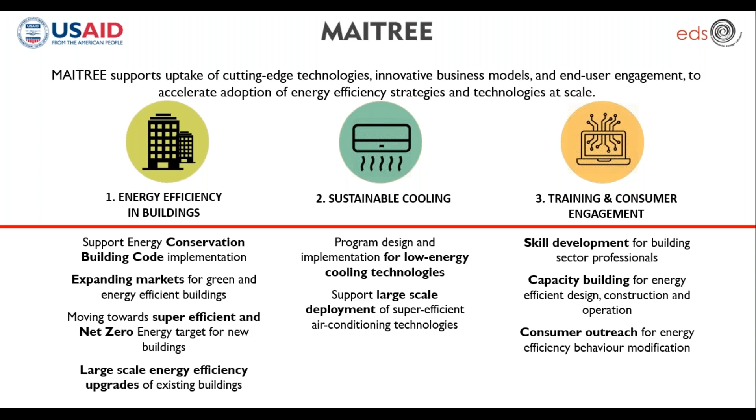The webinar series is executed under the MAITREE program supported by USAID. MAITREE is an acronym for Market Integration and Transformation for Energy Efficiency. MAITREE supports three main program areas: energy efficiency in buildings, sustainable cooling, and training and consumer engagement. The program works in partnership with several organizations such as Energy Efficiency Services Limited, Bureau of Energy Efficiency, and others to implement various initiatives. The market transformation approach includes creating business opportunities for the private sector, scale up of potential initiatives, enabling policies, as well as providing training for NZEBs. MAITREE is supporting effort moving towards a super efficient and net zero energy target for buildings in India.

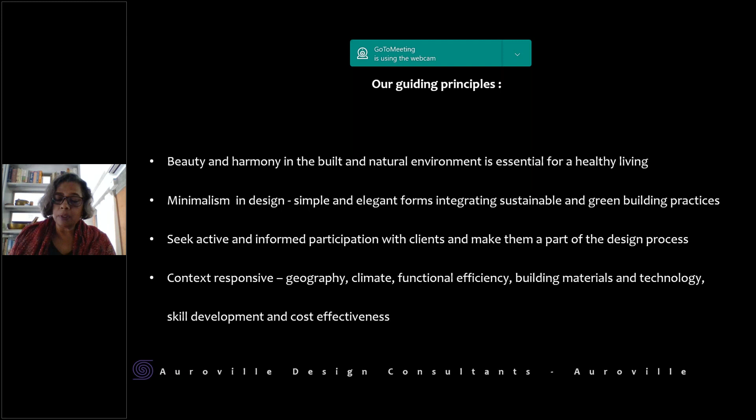Some of the projects we've been doing—the studio has been around now more than 3 decades. We did the Auroville Visitor Center, one of the first public buildings in southern India in compressed earth blocks. For almost a decade it was standalone in terms of energy, water, and sewage. We were treating the sewage on site, and that was the only water used in the landscaping.

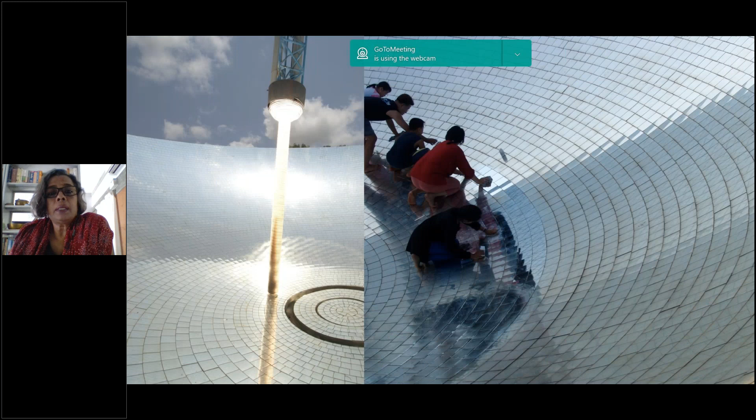We also undertook and implemented a solar thermal project with a fixed solar thermal device cooking food for 1,000 people each mealtime. This was completed a little more than 2 decades ago.

We have also been working with recycling of waste as the primary building material—this is an institutional building we did, again in Auroville.

We also do a lot of public buildings using earth as a primary building material, and most of the products that go into the building are non-industrialized products.

Now, coming to the main part of the talk, I'm going to talk about the HUMANSCAPES Habitat project. It is a case study, for me at least, of where design becomes a process rather than a product, rather than where you just go out with a set of skills and implement it.

The intention of the project when we started it was first to set benchmarks. We did that by inviting people with experience and knowledge to a one-day workshop, and went through several parts of the National Building Code, looking at what responses we could come up with to create a new benchmark for harmonious development, thereby addressing the present global crisis of energy and climate change. Especially for India, the crisis of energy is a very important point to address.

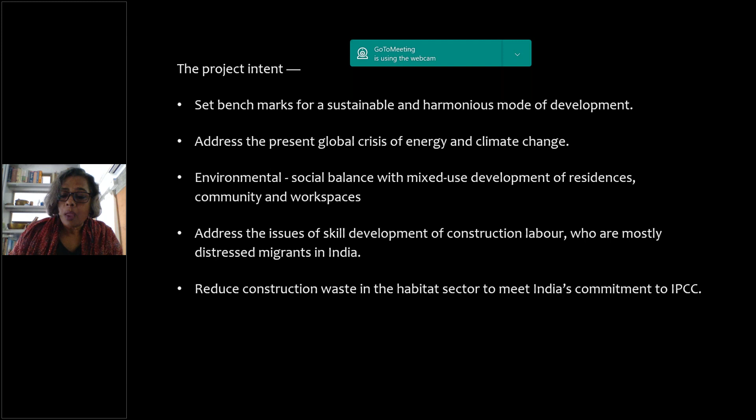So with these intentions, we fixed some project goals. Some of these were quite simple and straightforward—many of you work with these goals—which is integrated environmental planning, where water, energy, and waste cycles are closed, with zero discharge of water, reduction and recycling of solid waste, water-efficient landscaping, local endemic species, and urban agriculture.

The second goal was a sustainable built environment with solar passive building design coupled with efficient functional spaces, so that we reduce the built-up space and use low embodied energy building materials.

The third was addressing the mobility component, where work from home and integration of living and working spaces. It's amazing because we started working on this in 2014-15, looking at how living and working spaces could be integrated more with a better network of ICITI, and allowing for clean mobility options with social functions also mixed in.

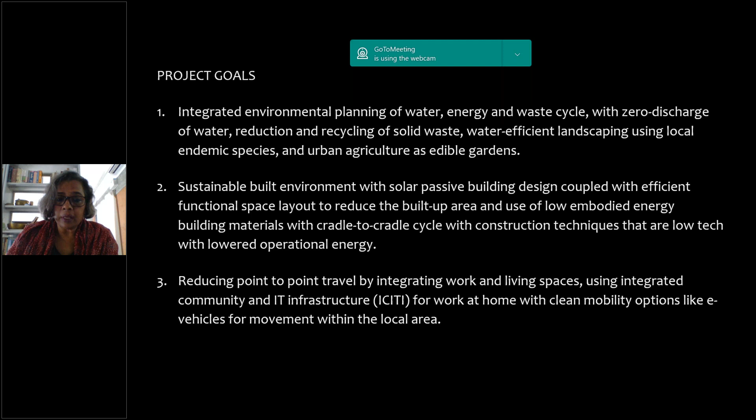So in a way, the project actually let us do a test run when the first lockdown happened a year ago, to see how we could operate from home.

The fourth aspect was human ecology. All the other things are kind of technological inputs and external factors that impact the lifestyle of people, but without the cooperation of the people, how do you actually make a change towards a sustainable living pattern? So we looked at how to work with the co-housing concept of living, how to facilitate interaction among neighbors for an inclusive socio-economic development that will lead to environmental benefits.

And last but not least, and this is why we are here on the EDS knowledge platform, is to establish a collaborative network of knowledge resources so that we start interlinking with other institutional knowledge sharing and dissemination platforms, to not only share what we have done, but to also learn from their experiences, to be able to take this project as a constant learning platform. So starting with...

the Sustainable Development Goals, as most of you are aware of, India has signed up for the Sustainable Development Goals, 17 of them. And based on the benchmarks we set with the professionals, we addressed about 10 of them, which are: health and well-being, water and sanitation, affordable and clean energy, decent work and economic growth, industry innovation and infrastructure, sustainable cities and communities, responsible consumption and production, climate action, life on land, and partnership for the goals.

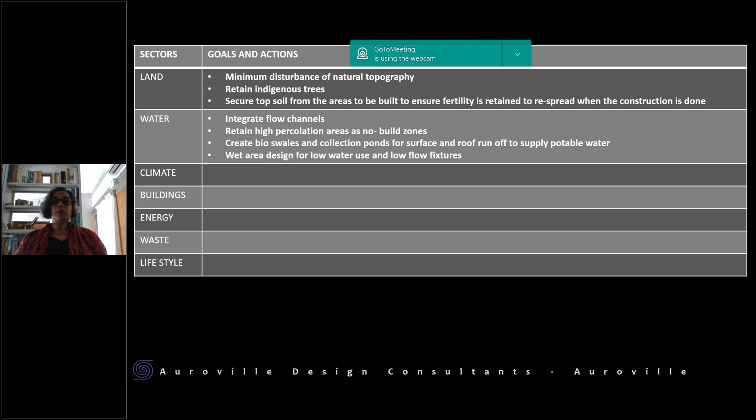And when we dealt with water, it was about integrating flow channels, retaining high percolation areas as no-build zones, creating bioswales and collection ponds for surface and roof runoff to supply potable water, and designing wet areas for low water use and low-flow fixtures. And this is how we did it.

We looked at the site, the natural topography that was there—natural in the sense that it was, of course, an agricultural field before, and there was disturbance to the natural topography over the last 3-4 centuries with the degradation of the land, deforestation, rain-fed agriculture. So the land that was allocated by the Auroville Planning Group to us, we mapped it—the topography, the trees, the porosity of the soil—and retained as much as possible the natural flow of water.

Based on that, what we did was we came up with what we call a bioswale, which is here, and looked at all the different micro drainage patterns once the buildings would be introduced, to see how we collect the rainwater in different areas and channel them in such a manner that finally the ecological corridor, as a filtering mechanism, would allow these bioswales to fill up. Because Auroville is in an area which has very heavy rainfalls in very short durations, we could have 20-25 centimeters of rainfall over a period of 6-7 hours. So no matter how good the percolation of your soil is, it goes beyond the percolation capacity.

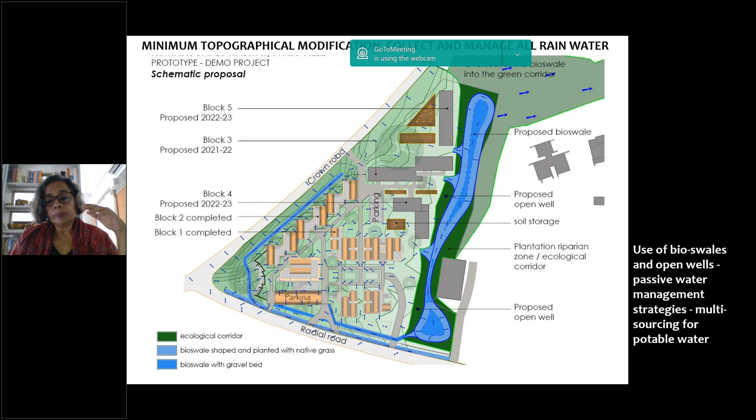And the idea is to use the bioswale where the soil filters the water and moves towards these open wells, from which, using a DC pump with solar panels, we can actually pump out potable water. So that means instead of holding it in concrete underground tanks or any kind of HDPE tanks, we actually use the land itself as a filter and holding mechanism, and use the open wells, which are maybe about 20-25 feet deep, and repump back the water.

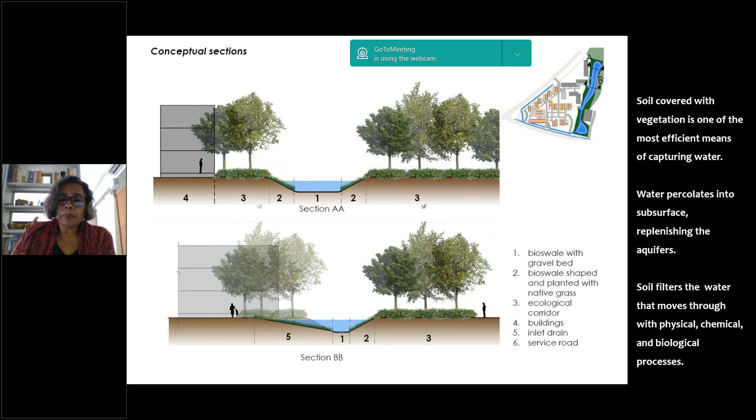We are doing this actually with Integrated Design, a company in Bangalore—most of you must be familiar with them. And the end result would be, we have a landscape space that during the summer would be dry, most probably, but you would still have subsoil water, which we could continue pumping. This creates a multi-sourcing of water, because presently Auroville is completely dependent on groundwater sources through bore wells for supplying all our potable water needs. And this groundwater source is not only falling rapidly, but along the coast it's getting salinated. So we're looking at various options of multi-sourcing of potable water, and this is one of the options that we're working on.

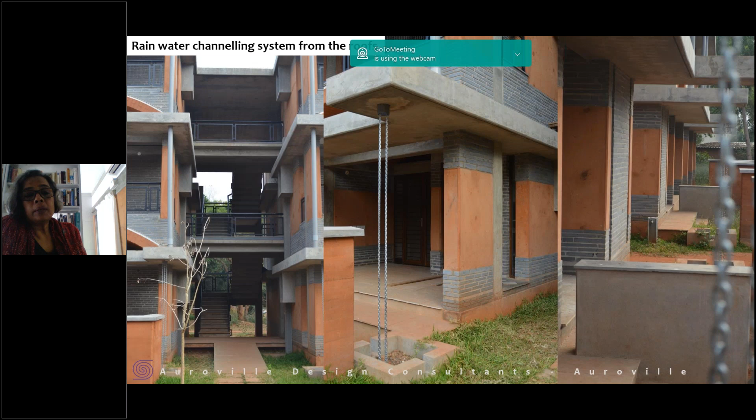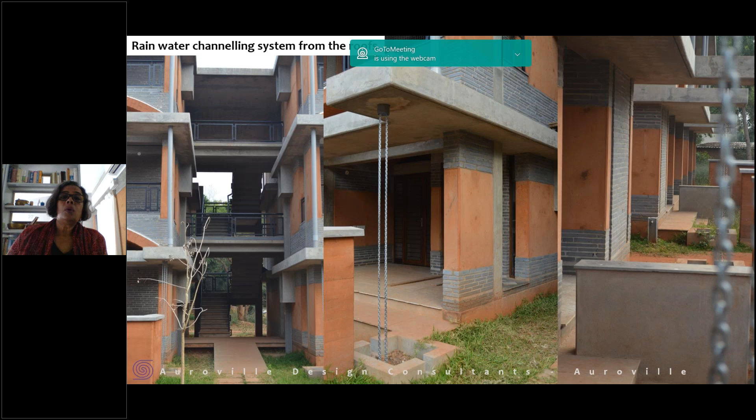So to be able to fill these bioswales and ponds, the buildings have been designed to collect all the roof runoff through various overhangs, channels, and gutters, channeling it into holding tanks that act as sunken courts during the dry season, which then overflow into further channels that fill the bioswale. It's several steps of holding, collecting, slowing, and overflowing, so that by the time it reaches the bioswale, it has created a sponge effect with the grasses, shrubs, and root system that holds the water even when the surface water starts to dry off.

Because the water holding capacity of the soil, when it has the right size plants, is incredible, and you don't have so much evaporative loss then.

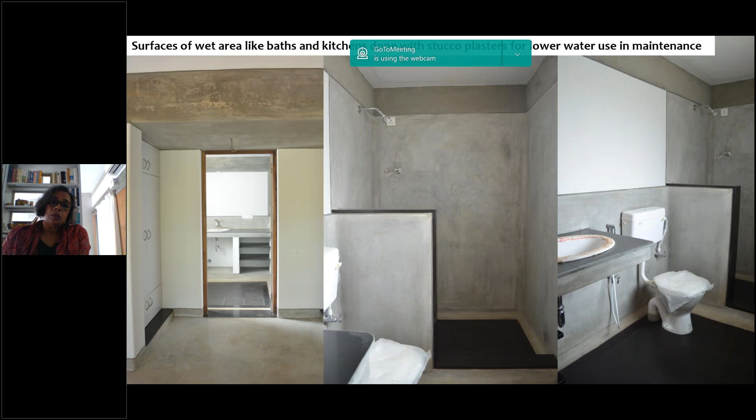To be able to collect rainwater and use it as a secondary source of water is great, but we also looked at how to reduce water consumption. Of course, the end-of-pipeline solution, which is very popular, is low consumption taps, low flush toilets, and stuff like that. But what we realize is that reduces water consumption only at certain points.

Other areas of water consumption involve water used for cleaning, like in bathrooms where you have ceramic tiles, which are not only high embodied energy, but tend to have such an impeccable finish that unless you have highly softened water, you're going to use a lot of water to keep them sparkling clean. So we started working with IPS, Indian Patent Stone, which is basically a cement finish with oxides and marble dust to produce impervious walls. Instead of tiles, these walls act as impervious surfaces in shower areas and kitchen dados. We also use only natural stone for the floor so the amount of water used in floor washing is reduced.

And finally, using the principle of minimum water use by ventilating and lighting the toilets so that they always remain dry and smell-free, psychologically enabling people to use much less water as a cleansing mechanism. Because whenever we use water as a cleansing mechanism, basically what we're doing is using water as a diluting mechanism to clean.

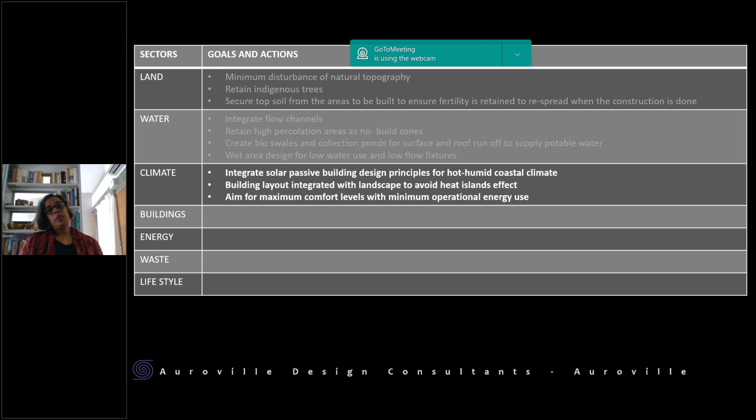Coming next to the climate, what we tried to do is address the conditions of coastal Tamil Nadu, where the project is, which has very low wind speed with seasonal cyclones that are very destructive. The problem when living along the coast is high relative humidity. Temperatures in summer rarely go above 40 degrees centigrade, but because of high humidity, the perceived temperature is worse than 45 degrees in a composite climate like Delhi. So we have to work with lower actual temperatures, but because of higher humidity, the challenge of building in coastal climates is much greater than in a composite or continental climate.

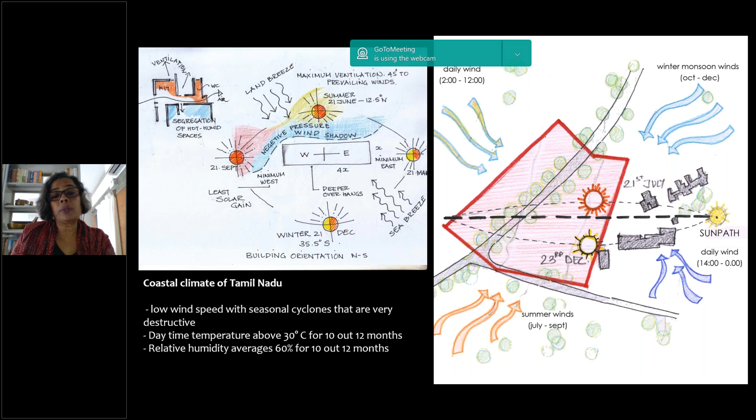The daytime temperature for most of the year, 10 out of 12 months, is above 30 degrees centigrade, and the relative humidity is above 60%. So we looked at different issues: orientation for least solar gain, and orientation to harvest maximum ventilation, since we have day breeze and night breeze due to the coastal region—the difference in temperature between land and sea changes the wind direction during day and night. And of course, the solar part.

Taking that into account, we laid out the buildings to create higher wind shadow, which creates negative pressure behind the buildings, allowing increased wind speed within the building. So when the incidence of airflow is at 45 degrees to the aperture, the wind shadow behind is much larger, and the air has a forced entry through the windows to compensate for the lower pressure on the leeward side of the building.

This allows for wind speed of 3 to 5 meters, which is the maximum wind speed most of the year, except during cyclones, when it can go up to 150 to 200 kilometers an hour. We managed to increase the wind speed in combination with electromechanical devices like fans to allow for a certain amount of comfort with ventilation.

Besides low wind speed, we have very heavy monsoons. We have two different monsoons. The summer monsoon, which is July to September, comes in from the Arabian Sea. This monsoon mostly rains late evening and at night with high wind speed and driving rain. But our main monsoon, where we get almost 70% of our rainfall, is in the winter, a returning monsoon over the Bay of Bengal in October to December.

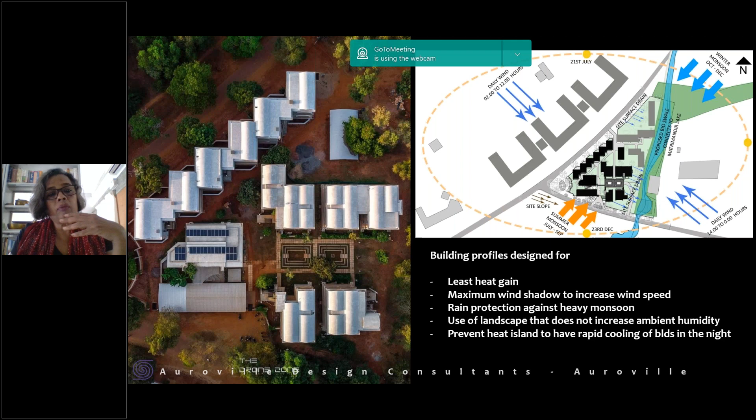So you might almost say that it's an impossible task in terms of building profiles to take care of all these 4 different contradictions that happen. But one can have a certain modulated response. You will not have a perfect response to any one of these 4 challenges, but a modulated response provides for adaptive comfort.

This adaptive comfort works both during the summer with higher wind speed along with fans, during the monsoon with negative flow of air that prevents humidity from entering, and during cyclones, being able to seal off everything till the cyclone passes. And in the summer monsoon, during the night when it's still very hot in June and July, to be able to cut off the driving rain and still have air movement coming into the building.

And we do this not only with the building profile, but also how the buildings are placed on the site in relation to the air movement.

And to each other, but also how the building apertures are sized and shaped, so that you create pockets of trapped air during the daytime in the summer, which can be flushed out quite rapidly after 5 in the evening when the sea breeze starts, by manual manipulation of opening and closing certain windows. And so we have to build up awareness of the inhabitants on how to deal with these openings.

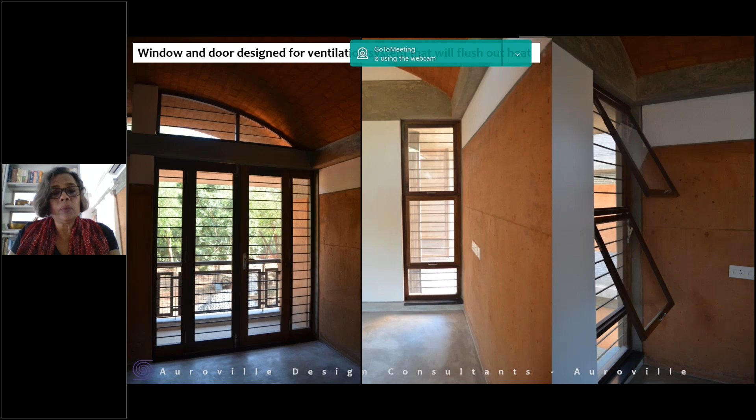And under the roof, we provide ventilation everywhere. In almost all spaces, we provide for under-the-roof ventilation, so that when we open the lower windows at 4:35 in the evening when the sea breeze comes in, the hot air rises and is flushed out before you start opening the leeward side windows to allow for the flushing through of the spaces.

This goes hand in hand with shading, because ventilation is one thing, but heat gain through direct solar radiation is another. So the size, location, and shape of the windows, along with the type of shading, has been looked into in all the directions. And wall shading, looking at orientation for the least solar gain, means long facades are north-south.

But during the summer, when the sun goes to the north, we may not need very long shading devices or overhangs, but the ambient temperature is high enough that even with shaded walls, with open doors and windows, you absorb a lot of heat through the air, through conduction rather than convection. So we need to take care of shading, not only of the walls, but also shading of the spaces around the building.

Now, when all this is done, designed and done, one has to also check.

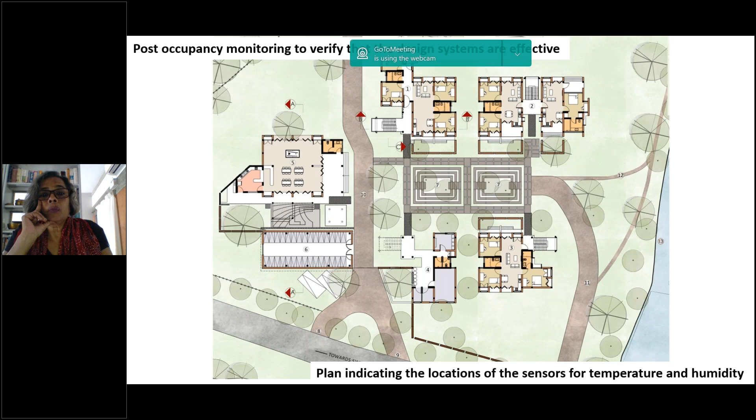So what we did, we undertook a 13-month post-occupancy data logging to verify whether the design interventions we undertook actually had some effect. In several places in one of the clusters, we had sensors put in for data logging humidity, temperature, and lux inside the building to look at comfort levels, and humidity and temperature on walls shared between buildings, plus wall surface temperature, so we could look at the time lag between the inside and outside temperature of walls and roofs.

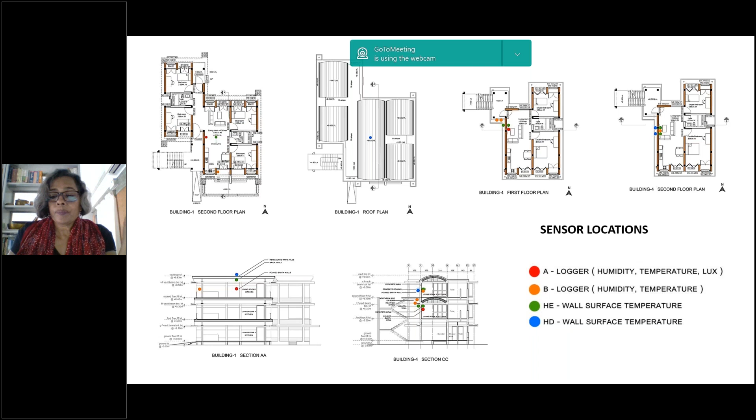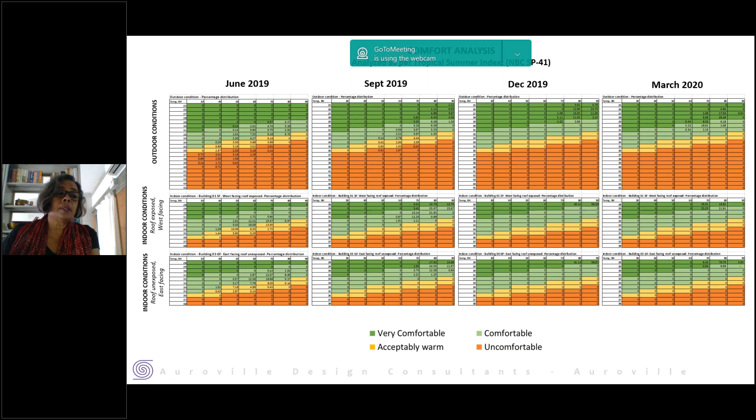Based on that, in different locations of the building—east facing, north facing, south facing—we data logged on a daily, hourly basis for over 13 months. So outdoor conditions, which is not just in the building but for the heat island effect, indoor conditions where the roof is exposed with the west wall facing buildings, and indoor conditions where the roof is not exposed and it's the east wall.

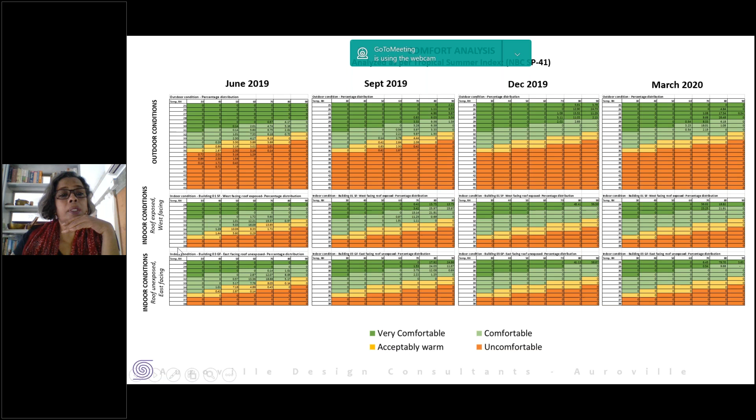We looked at a temperature range of 25 to 45 degrees with relative humidity of 30 to 90%, for outdoor conditions in June, September, December, and March, and indoor conditions of 28 to 38 degrees, again with 30 to 90% humidity. Taking that into account, we found that during the worst period, which is May-June for us, 22% of the time we were in an uncomfortable area of temperature and relative humidity. But for the rest, 50% of the time the outdoor temperature conditions fell in the comfortable zone, and 1% of the time it was in a very comfortable zone.

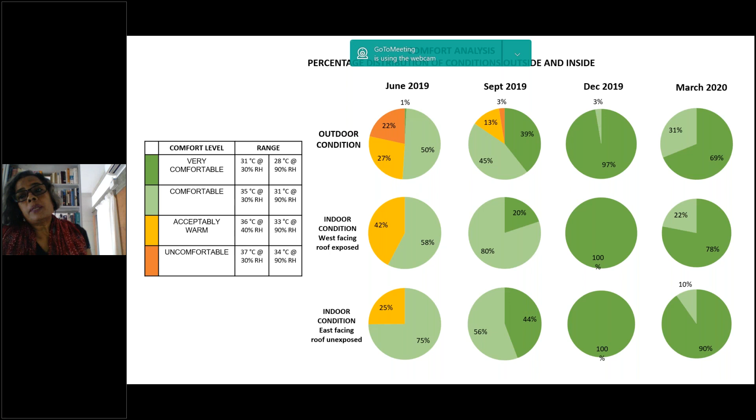Moving on, between September, which is not such a comfortable month here because the relative humidity becomes pretty high after the summer monsoon, we had only 3% of the time uncomfortable conditions outside the buildings. December, March, of course, are the best periods of the year.

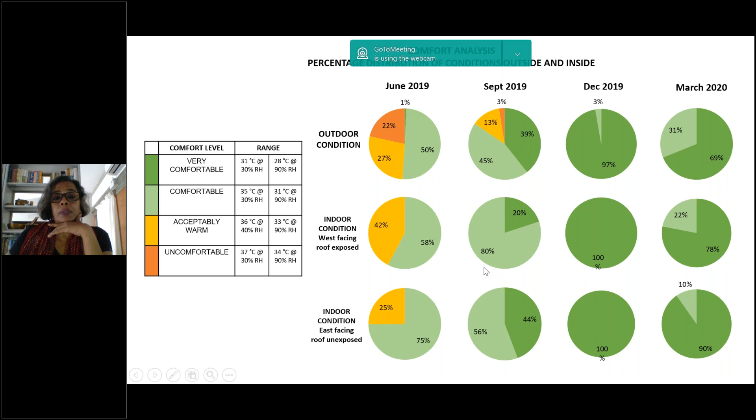Now, indoor conditions: we saw that for the west-facing building with the roof completely exposed, meaning heat gain on the western wall and heat gain through the roof, in June 58% of the time the indoor conditions were comfortable—35 degrees centigrade at 30% humidity, to 31 degrees centigrade with 90% humidity. And in September, it was 80% of the time comfortable, and 20% of the time very, very comfortable.

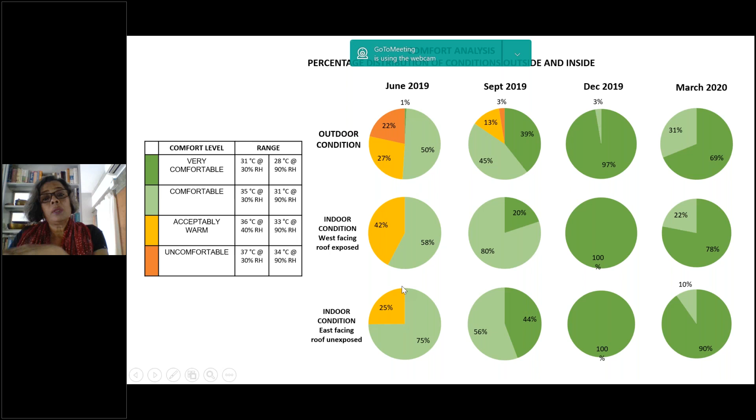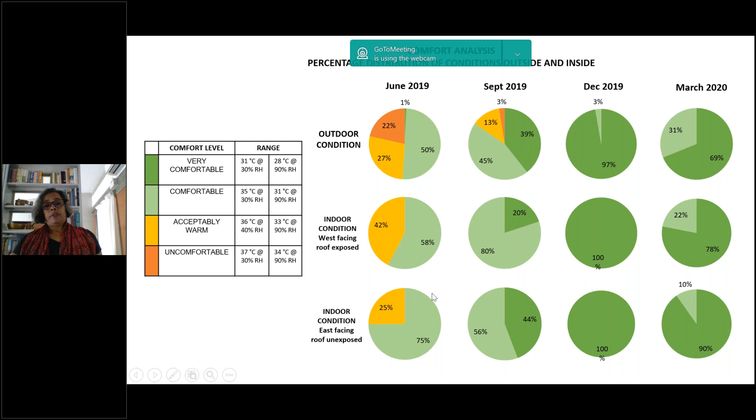Same thing for the indoor conditions which is ideal—east facing, and the roof is shaded. When we saw that with just simple shading of the roof, not being exposed to the western side, comfort level can go up from 58% to 75%. So basically, if one could avoid completely having an unshaded roof, it would be ideal, but we could not avoid that.

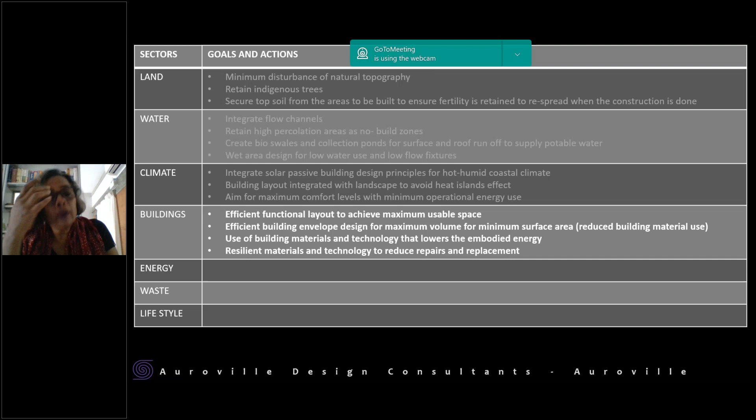Moving on, now coming to the buildings: we looked at several aspects during design, which is the functional layout of the spaces and efficient building envelope design, building materials and technology, and the kind of building—how do you reduce repairs and replacement.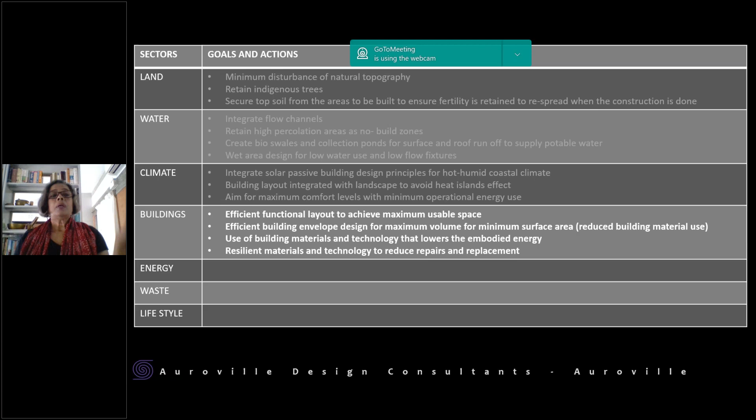When we talk about building efficiency, one of the things we take up as a challenge, not just in this project but almost all our projects, is how to reduce single space, single functional use. This is quite critical for architects to look at, because most of the time we label rooms in a building and it becomes duplicated space—for example, you take the bedroom, label it master bedroom with dressing and bath and all that, but it's never used more than 25 to 30% of the life cycle of the building. Over and above, it has a lot of appliances, fittings, furnishing, and spaces duplicated in the living spaces, in the family spaces, and other areas.

How do we actually design so that these single-use spaces can be reduced, can have multiple functions? The second aspect is the layout of this functional flow in such a manner that you bring a drastic reduction of circulation spaces. Third, how do you juxtapose these spaces so that you reduce the amount of partition walling? Because more walls means more materials, more embodied energy. So rather than just looking for the least embodied energy material, the first thing is to reduce material use itself, reduce the amount of space built, reduce the need for circulation space, so you start already with the minimal amount to be built.

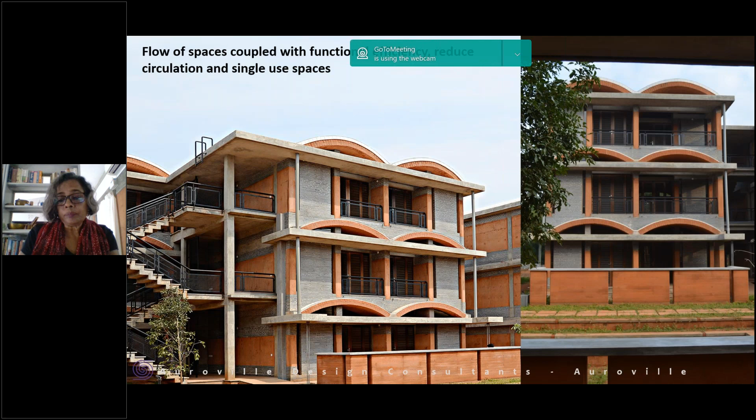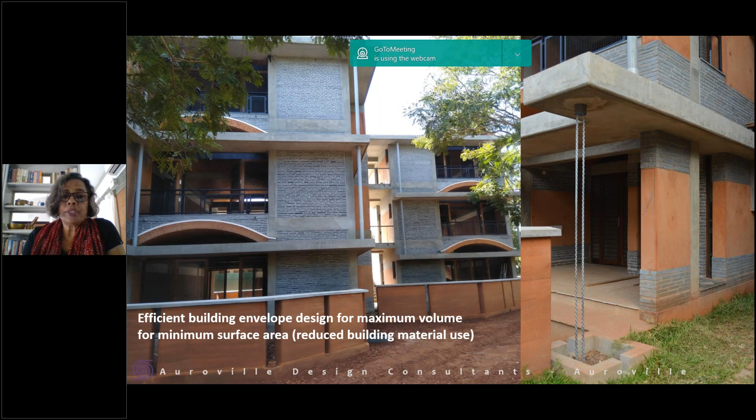The second thing we go for is efficient building envelope, which means enclosing maximum volume with minimum surface area. This is an interesting design challenge for architects: how do you create comfortable, aesthetic, functional spaces with the least amount of walls and footprint, so that the envelope holding that space uses the least amount of material. This also impacts comfort level inside, since heating, cooling, and shading needs come down rapidly.

Moving on to building materials and technology, the main walling material we used is what we call poured earth concrete. This was something the Auroville Earth Institute had been working on for a couple of years, and we took it on as applied research for this project to test how we could use this construction technology and material to integrate construction and demolition waste.

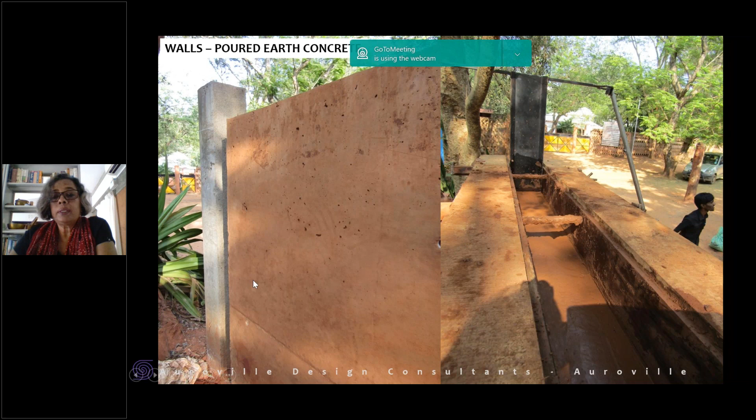The composition of the poured earth is basically earth, sand, cement, and graded construction and demolition waste, mixed in a concrete mixer and poured between shuttering. This is the shuttering on the side, and when it's de-shuttered, this is the wall you get. If you look at it, you get a wall finish which is pretty good—it doesn't need any finishes afterwards, like putty or plaster.

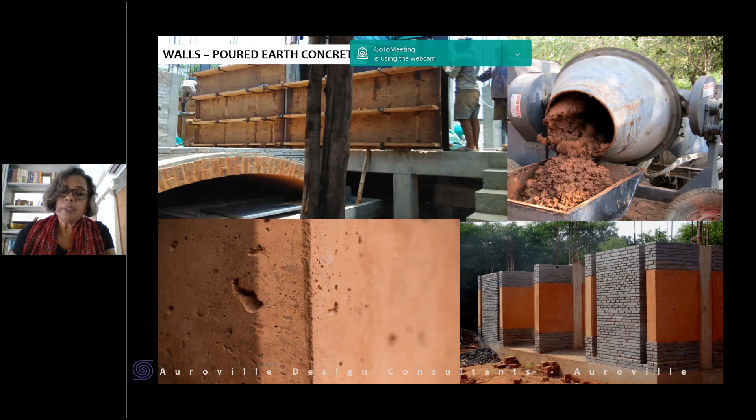The other material we use is industrial waste. Kadapa district, not far from us, has a lot of mining of basaltic stone, the Cuddapha stone. After the boulders are cut and sliced, the edges are trimmed to get rectilinear shapes, and these trimmings are dumped on the farms of distress farmers. We've been in contact with some of these factories buying the trimmings, and we use that as a walling material in several areas.

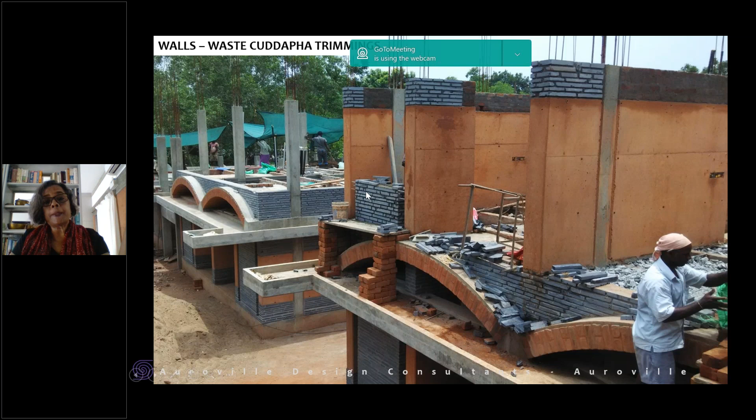We use it on the lower part, which is vulnerable to erosion during driving rain, and just above the roofs where driving rain could again cause erosion, as well as just above the walls where concrete lintels and beams have to sit. This is a waste material requiring very little skill to use as a walling material, and it doesn't need any finishing—it actually gives deeper grooves and micro shading between each layer. This is the final effect of a combination of earth and Cuddapha stone trimmings.

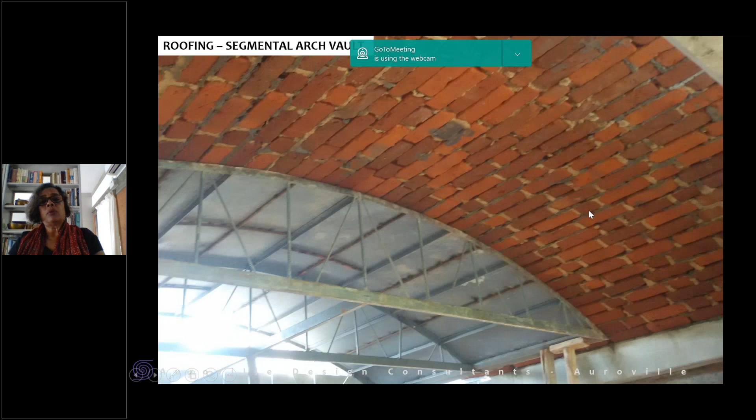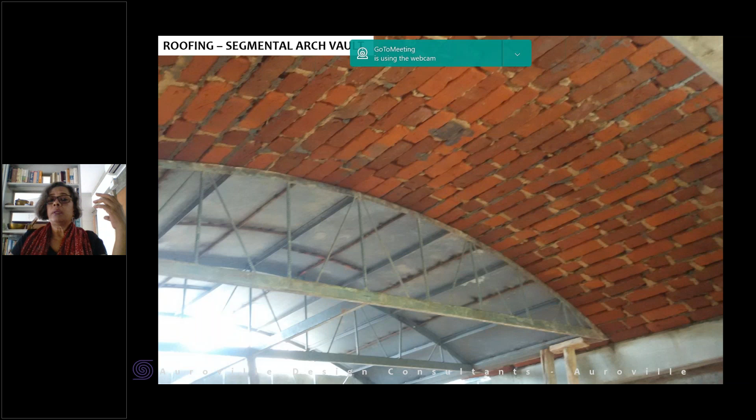Finally, on all the roofing between floors—since these are apartment buildings—the intermediate floors are made of segmental arch vault. There's very little concrete slab; these are made of local fired bricks which are not wire cut. They're very poor quality bricks, but because of their porosity, they actually help reduce reverberation of sound and sound carrying between one apartment and the other. This is finished with stabilized earth mortar. So the segmental arches act as intermediate floor and the final roofing.

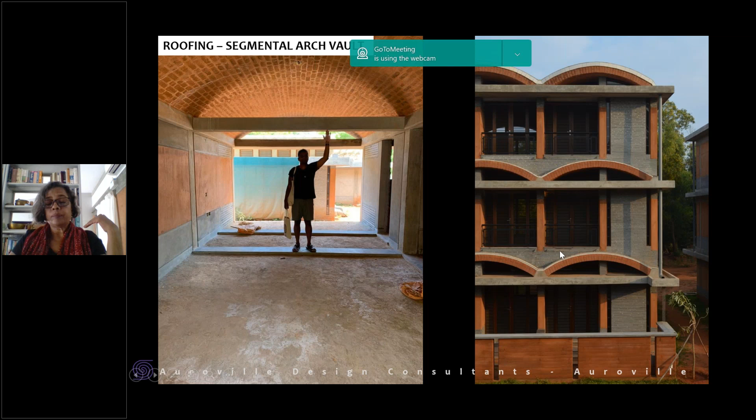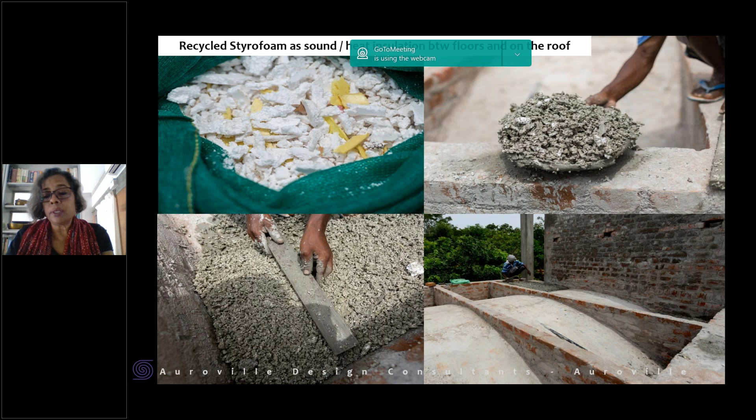The fourth material we use is recycled styrofoam, or what we call thermocol. Pondicherry has a lot of assembly industry, and in Auroville we also generate a lot of packing material with styrofoam. There's a shredding machine built in Auroville that can shred it into different sizes—larger sizes for infill, smaller sizes for walling material. Above the segmental vault, it's filled with styrofoam, which acts as a lightweight filler plus sound and heat insulation, and over that, the flooring is done for the apartment on top.

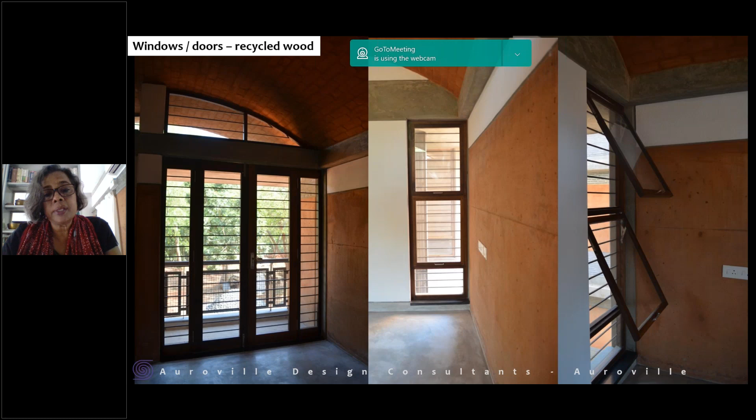The doors and windows are all recycled wood. Unfortunately, the heritage part of Pondicherry is slowly disappearing, and the Madras roof beams and doors are being sold off. We keep buying them and recycling them into doors and windows.

The final part is the exposed roof. The reflective white tiles are third quality from a local factory where we have an agreement with them. They pile it up, and every time we need it, we go and buy it from them, so even the distance of acquiring these tiles is reduced.

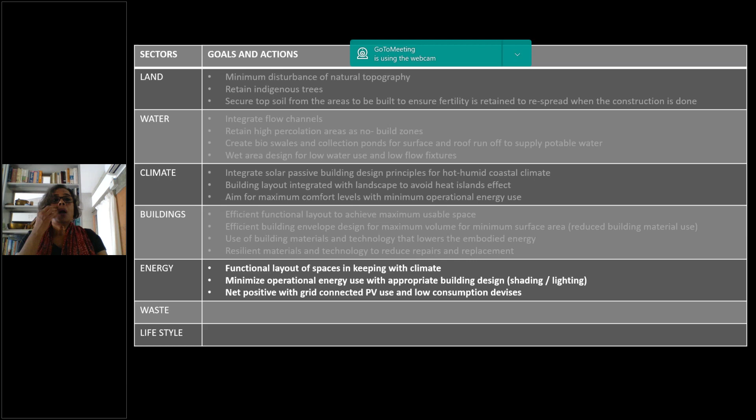Coming to the energy part, we have done three different things when it comes to energy. Because of the building shapes, the aperture location, sizes, and how they are placed, we reduce the operational energy needs.

Because of the way the building apertures are placed in relation to each other, ensuring privacy, both visual and sound, we also reduce the need for screening between neighbors, so that you have constantly free flow of ventilation. The third thing we are doing is reducing the glare by using mosquito mesh.

The mesh keeps out the mosquitoes and reduces the dust from the roads. When it's painted black, we actually reduce the glare. So we have diffuse muted light with free flow ventilation by the placement of the apertures, the building envelopes, how they're laid out, and the footprint of the building on the site.

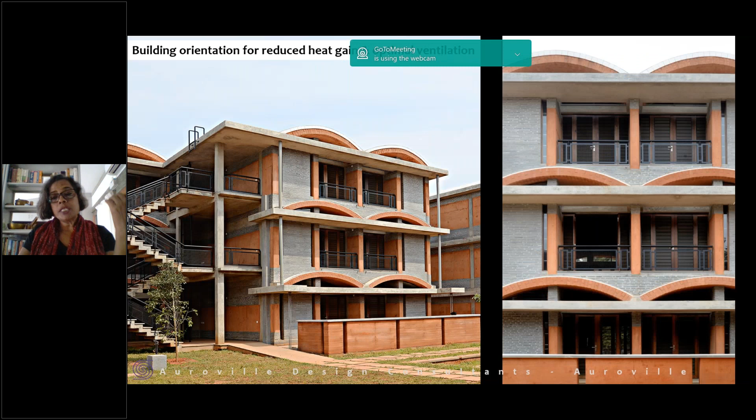This brings down considerably the operational energy needs. But of course, this is not sufficient. We still need to have energy. So we have grid connected PV, where we are generating sufficient amount of solar energy to meet our needs.

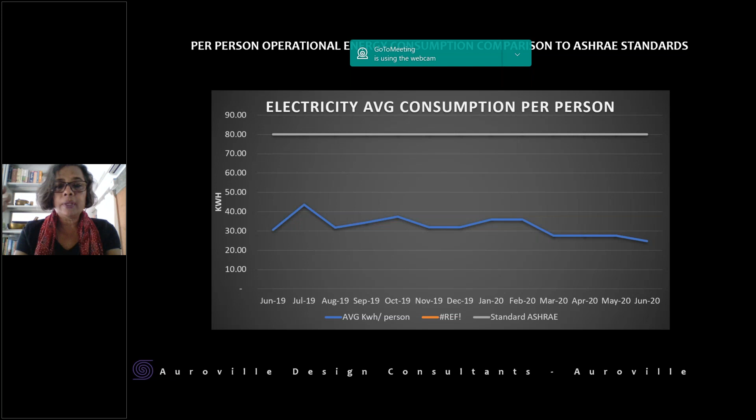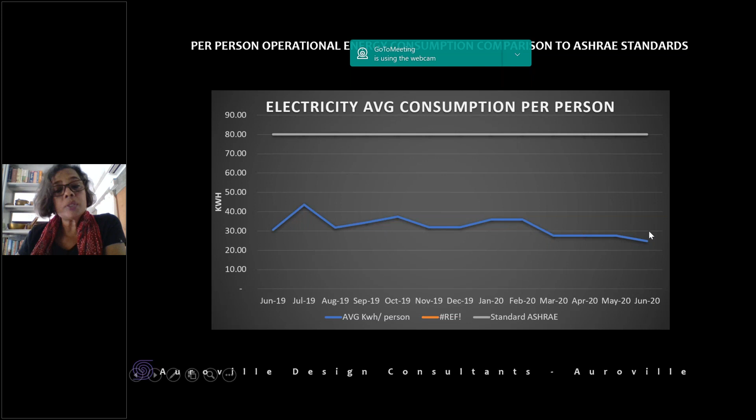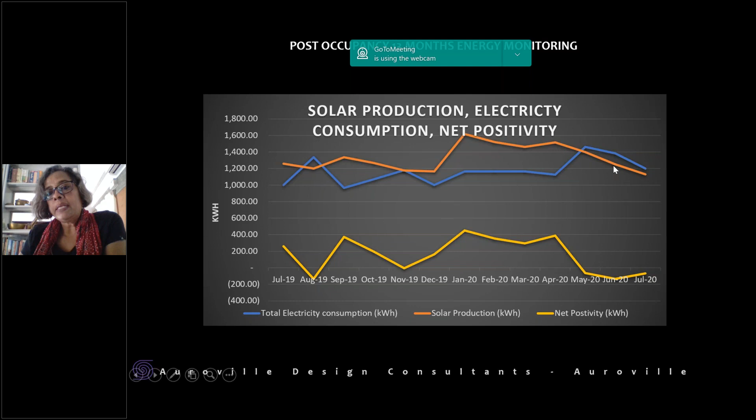Even though we are way below the ASHRAE standard, we wanted to make sure that we are net positive. So basically our solar production - this period is a bit funny because in May, June last year during the lockdown, there was nobody maintaining the solar panels, so we had a drop in energy production because nobody was cleaning the dust on the panels.

You can see how rapidly it dropped. And then the energy consumption was going up at the same time because most people were housebound and working from home. So the net positivity that we were looking at during this 13-month period clearly shows the dips and falls based on the lifestyle and the occupancy rate.

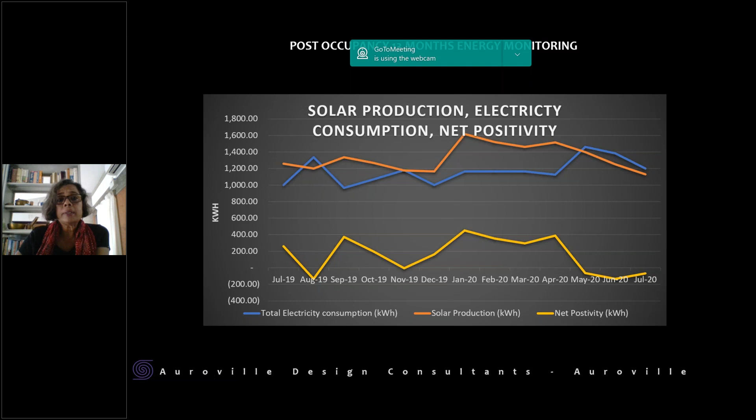Now, moving to the second last part, which is the waste. There are two different things that we're doing with waste. Sewage - the entire campus is connected to what we call a DEWATS system. The DEWATS system is actually capturing the black, gray, and the yellow stream all together, and it puts it through a biological gravity flow system where you have settlers and anaerobic filter.

Previously we used to work with root zone to oxygenate the water, to remove the turbidity and fix oxygen, because by fixing oxygen you have clarity and the smell removal. But now we're using vortex to do that. And finally, the collection pond from where the water is used for irrigation.

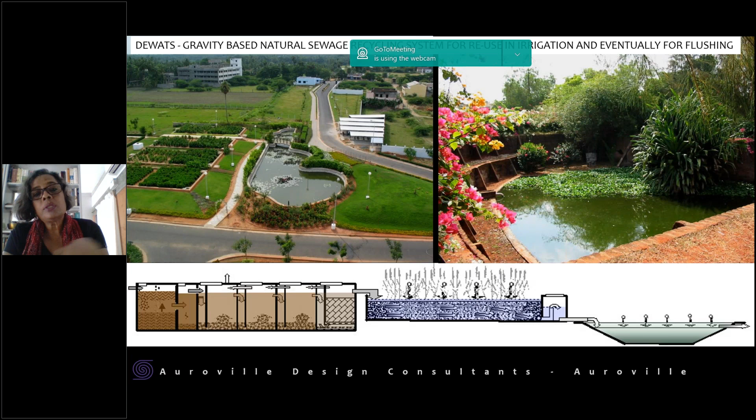Presently, we are not reusing the treated water for flushing. Unfortunately, the treated level is insufficient to actually store it over several days to reuse it as flushing water. But eventually we know that our technology needs to improve to bring it in, so that most of the flushing water is actually from the recycled water.

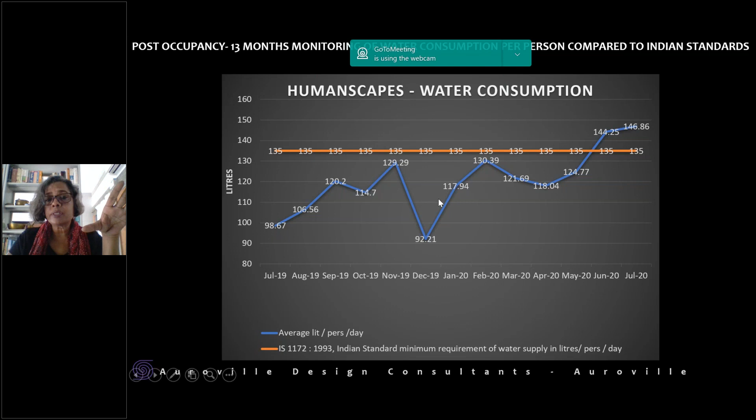We also looked at solid waste generated, and so we have trained the inhabitants to segregate the waste into glass, mixed, plastic, paper, sanitary, and landfill. The priority is that the landfill component is the least in terms of generation, so that every product they buy and use ensures the waste generated is not of landfill quality.

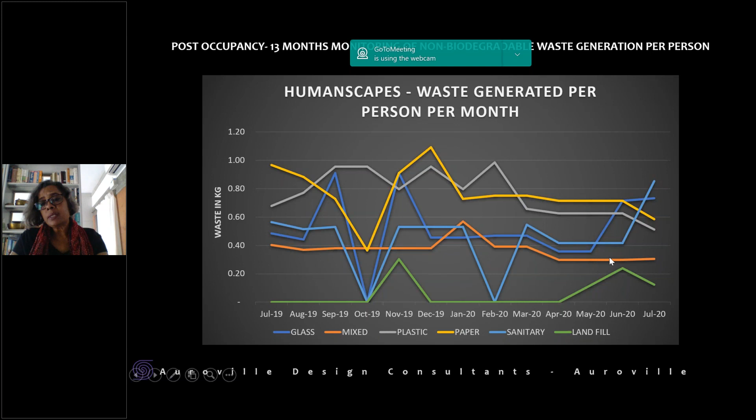But after almost 8 months, we start to plateau and start to have a certain amount of regularity in how the waste is generated and segregated.

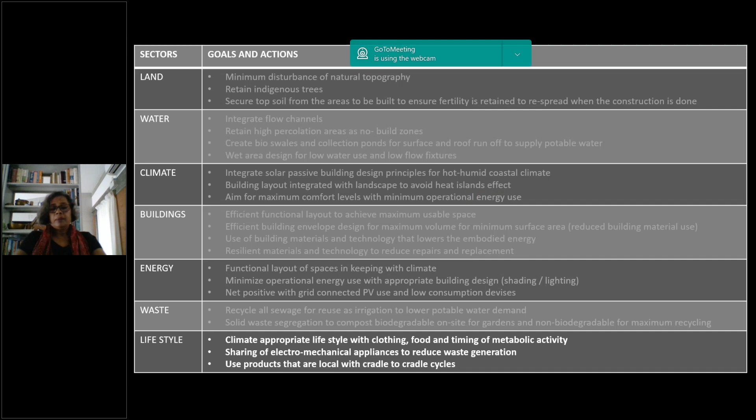Finally, I'm going to come to the most touchy part, which is the lifestyle. Now, after all these interventions, they are still kind of external and outside the intervention of the inhabitant. They have very little to participate except maybe how they use the water and what they do in terms of soaps and other things. But with the inhabitants, we had a series of interactions with facilitators and communication experts to build up several things.

One is the geographical climatic awareness, because we have people from 52 different countries of the world, each one coming in a psychocultural manner from very different climatic areas with very different cultural imprinting. So to get them to build up an awareness of how to live in a hot, humid, tropical zone.

Then, of course, the sync with daylight hours. This is something that the entire country, especially urban India, needs to look into. How do we actually work with a rhythm that goes with the daylight hours? I see that work-life balance, which is a third thing, is very much connected to the daily routine and working with the daylight hours. Then appropriate and resilient clothing, avoiding fast fashion.

Being dressed to your geography and your climate reduces the operational energy needs drastically, reduces the water needs drastically between washing both clothes and body, and further, at the source, reduces the amount of water polluted and used to produce clothing. And then locally sourced food and a plant-based diet, which goes in combination with the urban agriculture component that also brings in the use of treated sewage.